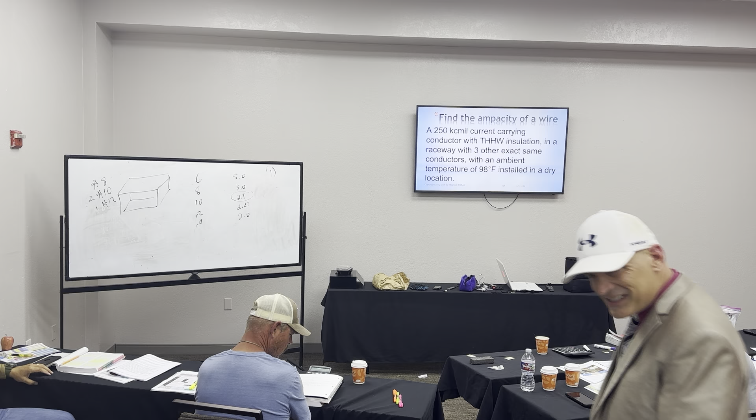We've got to do a couple of major sections here this afternoon. Did everybody get this? This is just somebody's notes. Again, this is a master's test, but it's even relevant to the journeyman specifically because of the sections, the type of questions and things. I think this is a good thing to talk about real fast, but I have not gone through here to vet the answers that he's got listed.

You got any extras of those? I didn't get one. Maybe they handed them out. It came in late, you came in late, sorry. Oh, I came in late too. Was there a package today? Yeah, I think this was yours. Oh yeah, yeah, yeah, right here.

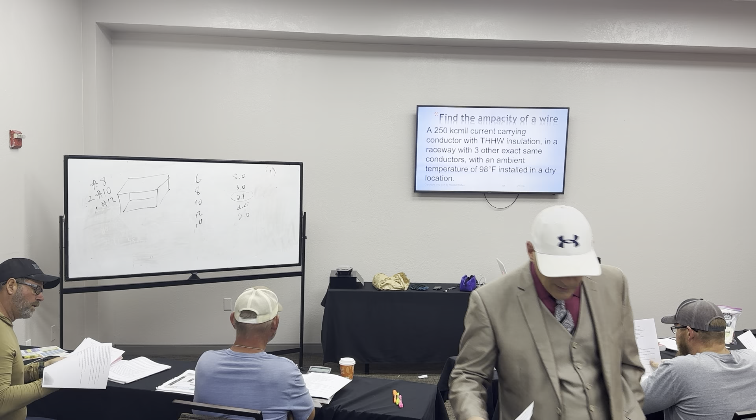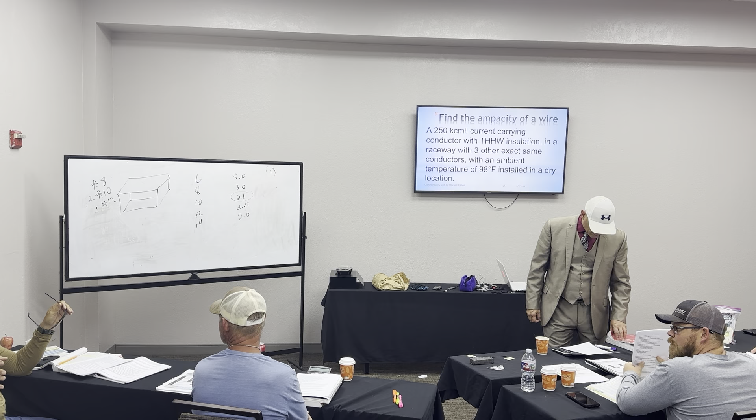We have an interprovincial red seal exam, so anybody else prepare? Everybody has a licensed journeyman in Canada. At the last day of school in 4th year, they would write the exam, and then they would keep the student allowance just for the guys and girls that wrote the exam. They'd sit down there and everybody get together and say, what questions do you remember? And then the instructors would write these questions down, not so that they could give them out, but so that they knew if they were teaching material that was relevant so that people could pass the exam.

You'd be surprised how many questions you'll remember after you write that exam. That's very true. If you went out to your vehicle with a piece of paper, you'd probably get about 75%. You won't forget right away. But the minute you pick up the phone or drive out of that lot, you'll lose half of them. If you look at page 11, at the top, see if that follows what you just said.

Do not leave the exam center until you write notes down. Keep a notebook in your truck, and as soon as you get out of the exam, before you drive off, write down whatever notes you remember. What he just said is probably the best advice I could imagine, because I can help you if I know what you're struggling with. If you drive out of that parking lot without writing it down first, you will go home and not remember. It's gonna happen - the first time you hit a stop sign, your mind's gonna go thinking about something else, and you'll lose some of whatever you just had. You're right there, it's fresh.

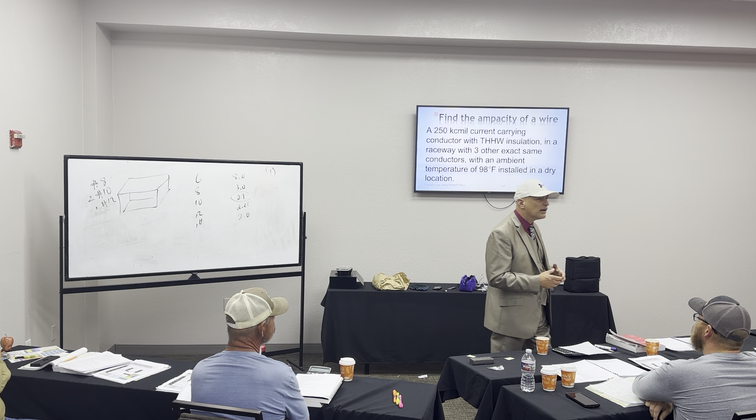So before you drive off, even if it's just a keyword, write it down. I can probably help you if you can remember the keyword, jot it down - you don't have to write the whole question. Just like if you had some particular calculation you were struggling with, or some question you didn't understand where to go with, those are the kind of things I can help you with if you can write down enough of it that I can get a feel for what they're trying to ask.

So, you guys have a name tag, she gave y'all name tags, right? My cell phone number is on the back of that.

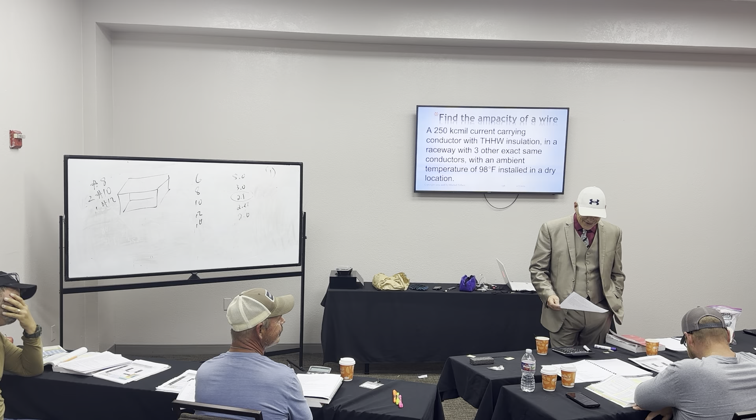So Ohm's law, right? I don't really want to tell you too much about Ohm's law because I don't want you to know much more than you absolutely have to have. So here it is, you see it in your code book is where it's at, and that's where I want to point you in the right direction. There are 2 formulas that are the only 2 you need to know, and they happen to take care of every single code section on page 28.

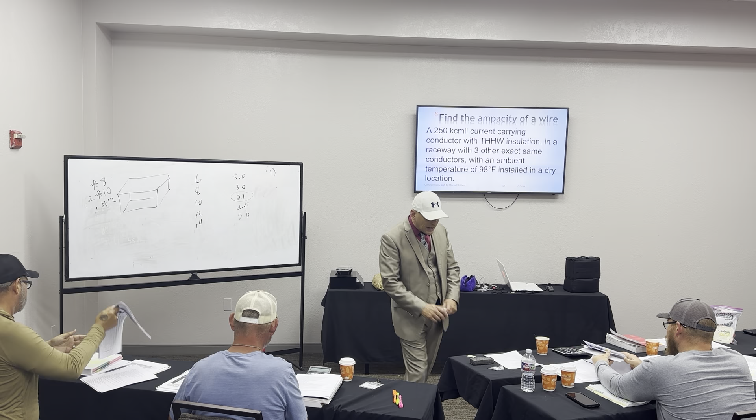Those of you who are older school, you know, PIE and EIR and all that stuff, forget it. Can anybody tell me what that E stands for?

I thought voltage started with a V. E over I times R? What is it? They explained it but I don't remember what they said. They said, what's the actual word for E? Energy? Nope. Electromotive force, right?

Yeah, I've never called a volt an electromotive force, ever. So for me, writing an E down is kind of confusing because I don't really recognize an E. I have to convert it in my mind mentally. A V, I know exactly what a V is, don't I? What about I? What does I stand for?

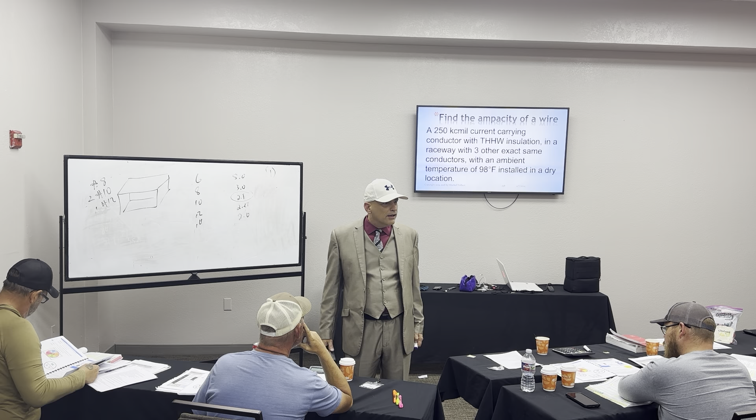I thought that starts with a C. Impedance? Nope, that's resistance. What does the I stand for? It's amps, right? I agree, but I thought amps starts with an A. But what does the I stand for? Current, that starts with a C. So what does the I stand for? Intensity of current. So again, I don't look at a meter and go, I wonder how many intensity of current values I've got here. I'm looking at amps, right?

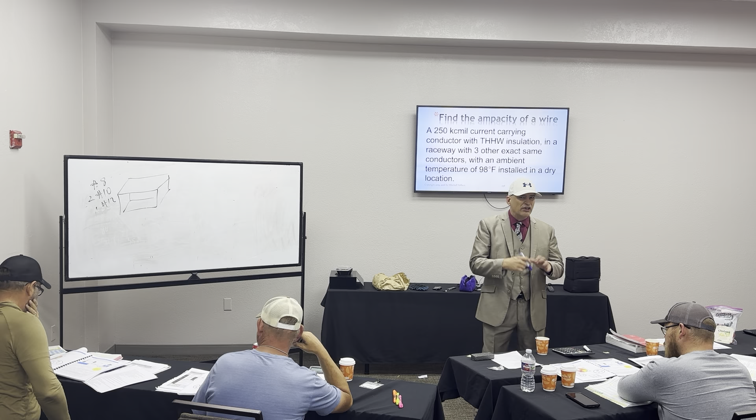So the EIR, the PIE, all that business you learned with, forget about it. It just takes too much time to mentally reconvert that. So here's what we're gonna do. I know a V exactly as a V, right? I know an A is an A, and I know an R in this case is a resistor. I know a W is a watt, I know an A is an amp, and I know a V is a volt, and that is so much easier to instinctively look at. You know what those values mean, they match up.

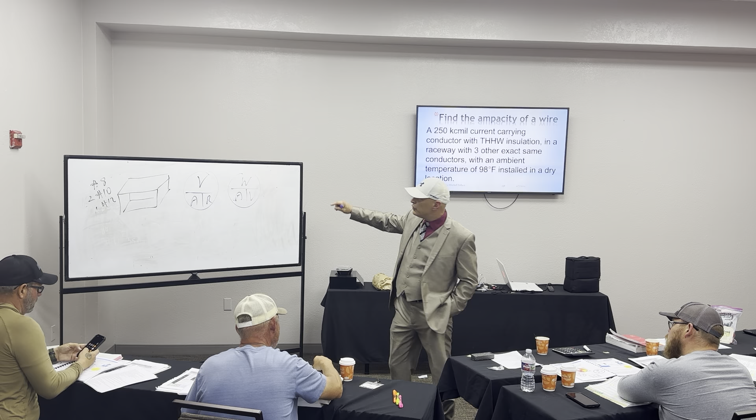So volt, watt and ohm. These 2 formulas are the only 2 you really need to worry about, but you do need to know them somewhat. If it has a resistor in the question, the only one you have to pick from is the ohm formula. If you're looking for a watt value, the only one you have is the watt formula. You use this one all the time without really instinctively realizing it, because that's what you do with an appliance, trying to figure out how many amps it is based on the system voltage.

We're doing the math here. This line, as I mentioned yesterday, that's a division. So if I'm looking for a value down here, I've taken the other one and divided it into the top. If I'm looking for the value on the top, this line here stands for multiplication. So I'm multiplying those two values together to get the top value. That's basically the formula that will circle.

Sometimes you may see it, anytime Henry uses a triangle or whatever, it's the same idea. Same concept - it's division, multiplication. This value and this value are the product of the two at the bottom.

And then the only other thing you need to remember is that these values need to be total values. In other words, sum of total at the branch circuit - total volts, total resistance, total amps, for example. Or when I'm looking at a branch circuit, I could be talking about just the values that exist right here across one resistor, or resistor number 2, or resistor number 3.

And so I can do the same formula isolated here with just the values that exist right here at this one point. When I do that, I'm going to think about that as V3, R3, A3, so I remember these are individual point values and not total values.

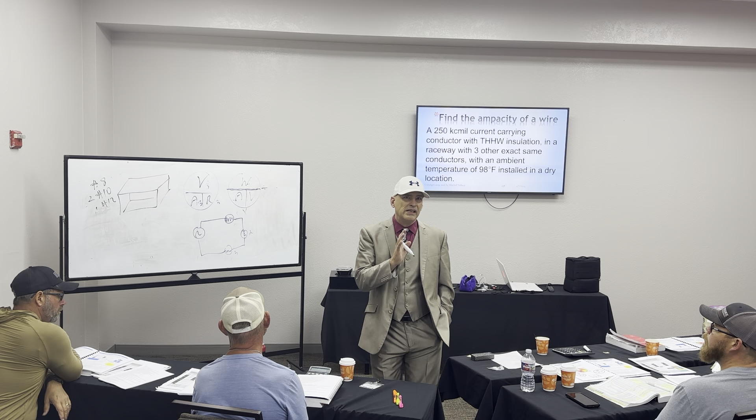Again, just because I wanted to make sure you remember that we don't want to mix total values and individual point values. They're either all just what exists there, or all total - sum total. Make sense?

All right, the other thing too, if you look on the top of page 28, I have parallel, these two little lines, the formulas written on the top of page 28, where you see the AT equals A1. You guys already know that instinctively. In parallel circuits, if I have 15 lights in this room and each light is 1 amp, then I'm going to take 15 times 1 and basically add or multiply it out and have 15 total amps, right? That's how it works. So the formula makes sense: AT equals A1 plus A2 plus A3 plus A4, the N standing for any number of additional values.

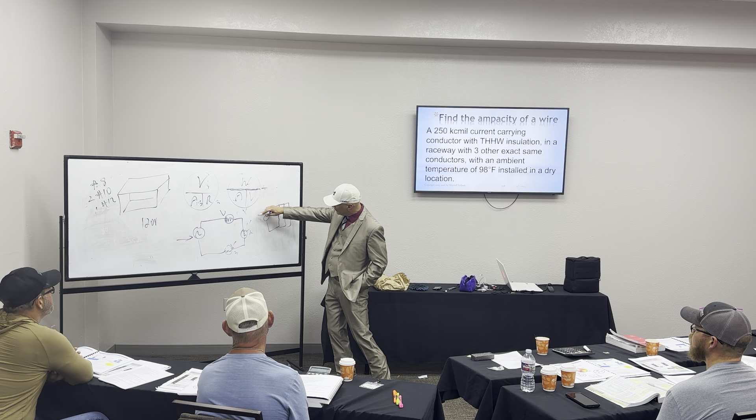But voltage in a parallel circuit, which is one of the reasons why we like to run things in parallel, is a constant value that doesn't change. So in a parallel circuit, 120 volts here - well, what do I have here, and here, and here? Well, this is a series circuit drawn... I mean, we're going to draw this here, don't want to confuse you all any worse than I already am. All right, in a parallel circuit where I've got parallel runs, the voltage here, here, here, here - they're all the same. Never change. I can count on that.

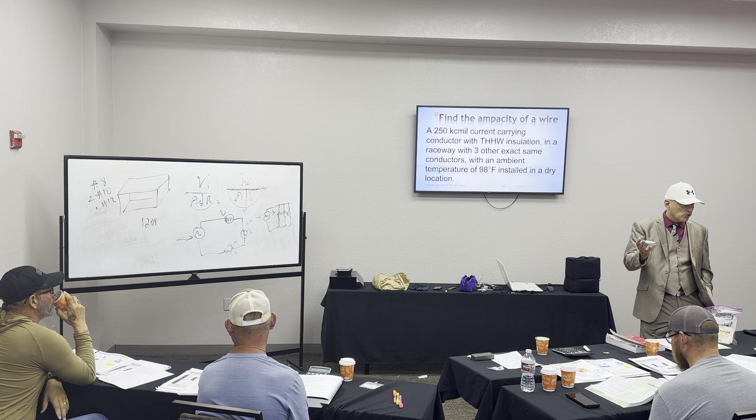In parallel, now if you look at the way we write that down, it's V1, or VT equals V1 equals V2 equals - so anywhere, the same value across the board. In series, they just reverse position. And I like writing it down like that because you can immediately instinctively realize what exists in parallel is the exact opposite in series circuits.

So amps no longer add up. This is really weird - so you're telling me that if I have 10 lights that are an amp each, and I add them together in series, it's going to equal 1 amp. Yeah, exactly, weird, right? It's weird. Amps do not add up. They're a constant value like your voltages in parallel. It's super weird, but once you get your head around it, I guess it kind of makes sense.

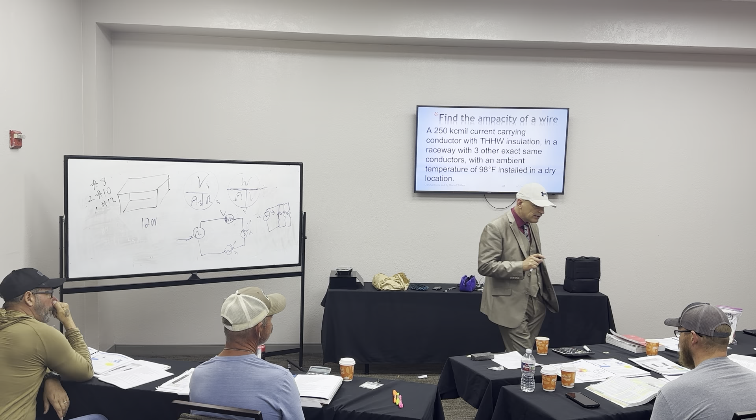But if I've got series PV panels, for example, if each one of those PV panels has 24 amps of output, and I put 10 of them in a string in series, I'm going to have a total of 24 amps worth of output. I do not get any additional add for amps in series. Now the good thing about that is that makes amps your ace in the hole, because if you know the value anywhere in that circuit, for a series circuit, anywhere in there, if I have one value for an amp anywhere in here, well then that's a key number, because then it's the same value anywhere else in that same circuit. Make sense? So just like voltage is our key over here in parallel, amps is our key in series.

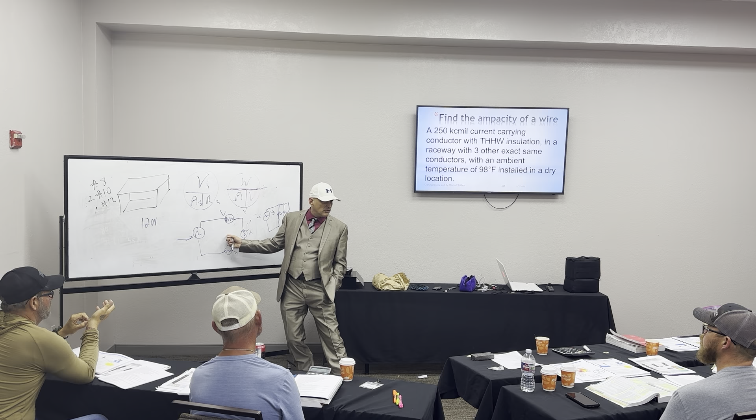I want to find out what the amps are as fast as I can, because that's going to unlock everything in that circuit. All right, that's that part.

Second thing to remember is that the volts drop 100%, or it's lost 100% across all resistive loads in a series circuit. So they write it as V1 or VT equals V1 plus V2 plus V3, but really the way we look at it is V1 plus V2 plus V3 equals VT. Every resistor in a series circuit is going to eat a certain amount of the voltage, and so when I come out of that resistor and go into the next one, I've got a lower value for the volts than I had coming into it originally.

So if this is 120 volts, for example, and I come through this resistor, I'm going to lose a chunk of it. Let's say it was a 6 ohm resistor, and this was a 3, and this was a 3 ohm. What would happen is I would lose 60 volts across that resistor.

How do I know it's 60? Well, because it's a proportionate loss, right? If I have 6 ohms, 3 ohms, and 3 ohms, if those two bottom ones are also the same, that means I'm going to lose half of it on the top one and half on the bottom. And not only that, I'll be able to tell you it's 30 volts on each one of the bottom ones because it's a proportionate loss.

What I'm getting at is if I have 120 volts coming into this and I lose 60, I'm coming over here down into this one with 60 volts. That's all I got left in the tank. When I go through that and lose 30 more, and I come in here and lose 30 more, I'm at 0 volts when I go back home. So I'm literally running out of gas, okay?

In a parallel circuit, voltage is not supposed to drop or lose. It's always supposed to be the same value, but we do sometimes have a voltage drop, and that's that 3%, 2%, 5% business you guys know a little bit about. So don't get confused with a voltage drop in series versus a voltage drop in parallel. In series, it's 100% loss. It's a drop of all of it.

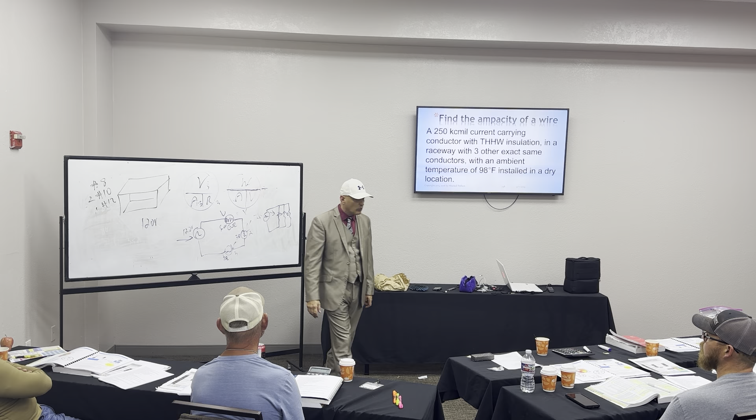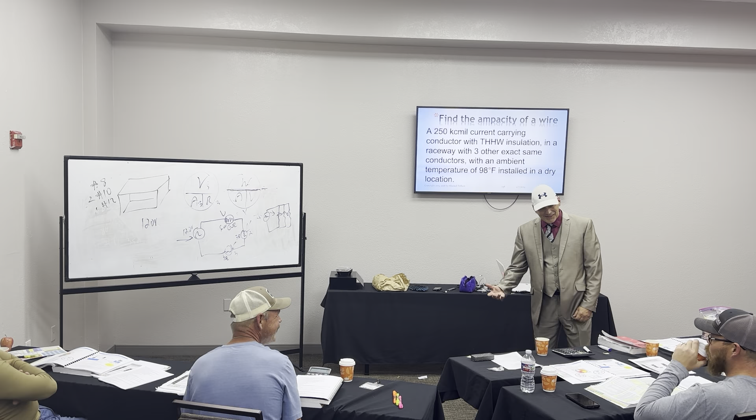You said 15 volts? 30? I'm sorry, 30 is what I meant. Thank you, I didn't write it down. I said 30. What's supposed to be 15 and 15? At least 60. Oh, 30, 30, 30, yeah, yeah, 60. 30, yeah, that's what I mean. I said 30, 30. Prove it. Anyway, thanks. Anyway, yeah, no, you're right, 30, sorry.

But you get the idea, right? It's a proportion loss. The bigger that resistor is, the more it eats.

So if there was 4 of them, then it would all be less? So you would start, would it still be, it's nice when your resistors are all values of a common number like 5, 10, 15, or 20, because you can almost do that in your head. If they're 3.5 or 6 and 12 and 8, it gets a little bit more messy because you can't really look at it cleanly. But at any rate, all right.

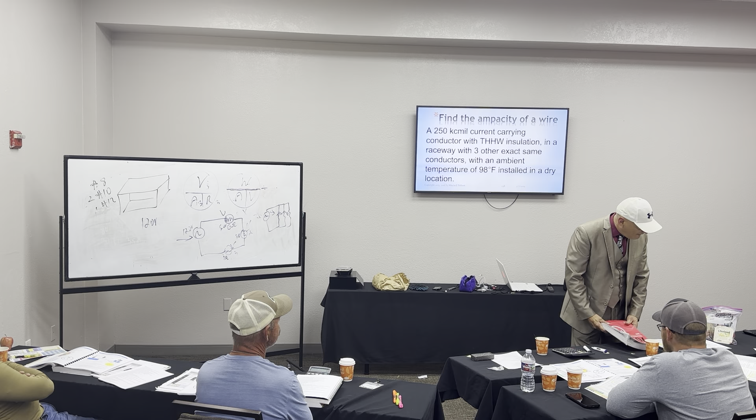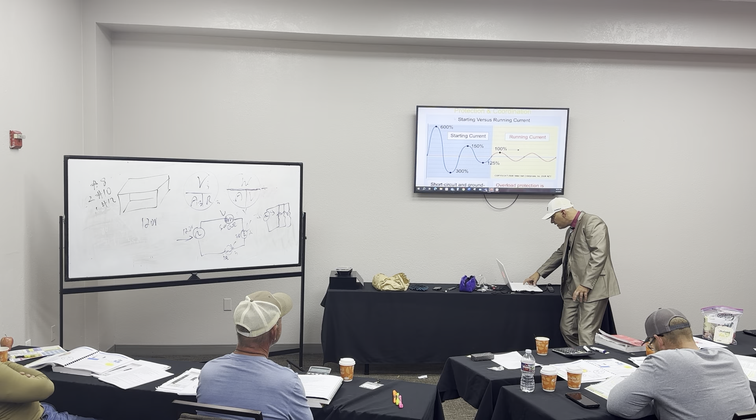Now, here it is. The two most complicated calculations you might possibly do would be resistors in parallel, which suck, I don't know how else to say that, or if you're doing calculations for voltage drop. I think those are the two things that confuse people the most. So I'm just going to quickly do a couple of quick examples. I've got some slides here, I think it'll be helpful for you to see. I'm going to go kind of fast because it's something I don't really need to get too heavy into, but I do want you to be somewhat exposed to it.

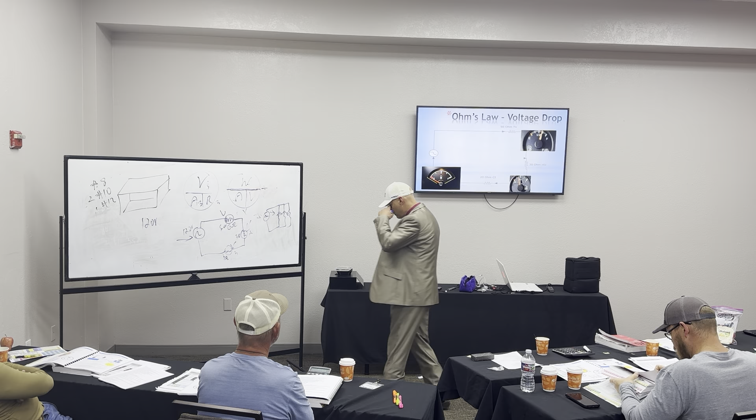I do want those two values or those two formulas that you see right there written down in your code book because those are the two that you really need to have and really need to know. There's one more formula that we'll get to in just a second that's also important, and that has to do with resistors in parallel. You guys don't need to write this one down, but you may have seen the formula called the inverse proportionate calculation for a resistor in parallel. It's kind of complicated and not very easy, I think.

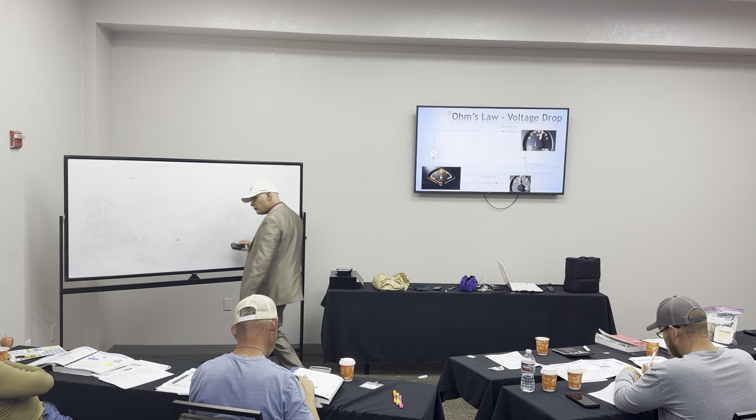You guys like fractions when you were in high school? Elementary? I know, right? So if I have 1 over...

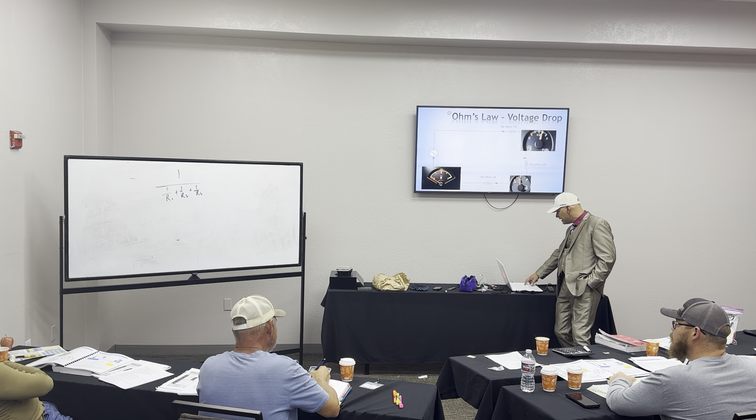So when you're looking at resistors in parallel, I think the way to make more sense of it is to think of it like a pressure tank. If I have a series circuit where I've got one gigantic water tower with one pipe that all the water comes through, that's a series circuit, and the diameter of that pipe, the length of it, and all the resistance it has to go through, every bit of that pressure has to go through that one pathway.

Make sense? So in the parallel circuit, it's more like a bucket where I put a bunch of holes in it, because the more pathways there are for that pressure to go out, the less the overall pressure is combined. Does that make sense? That's what's happening here with resistors in parallel.

Now to calculate that, I would put these into this formula here, and I'd have to do 5 into 1 and 10 into 1 and 15 into 1, and it's kind of a mess. You've got to convert those into decimals and add the decimals together, and then divide it into 1 again, right? So I would really prefer you to just forget about that one.

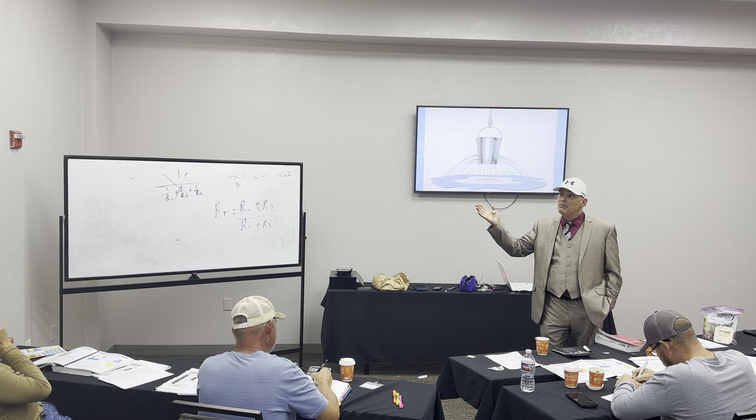There's another one that works with 2 resistors. This is much simpler math. Basically, if I have just 2 resistors in parallel, this formula will be a lot easier to use with those 2. And furthermore, I can use it with more than 2 by pairing them together one at a time, or a set at a time.

In other words, if I have 3 resistors here, what I can do is the formula of these 2 here, and get one value for those 2 together, and then do that one more time using the combined value and the other one together. So for example, RT equals R1 times R2 over R1 plus R2. In this case, we'll call this R1, R2, and this one something else.

So I've got... that is 5 times 10, and then 5 plus 10 on the bottom. So I'm looking at 50 divided by 15, right? 50 divided by 15 is 3.33 ohms. So these two combined give me 3.33.

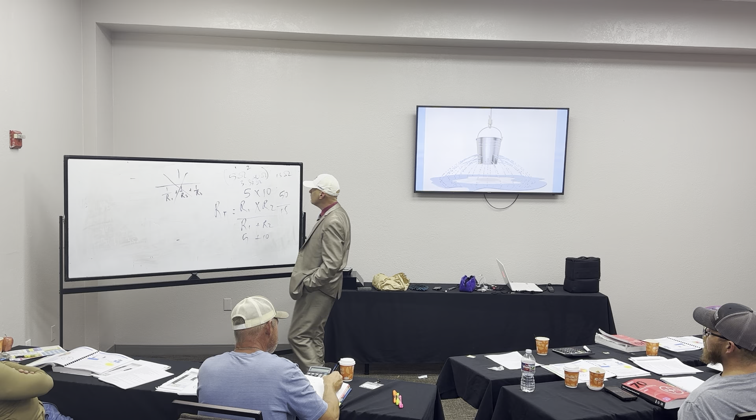Call it 3.33 ohms, put it there, okay? Makes sense? I'm looking at that 5, and that number needs to be less than the 5, so I feel like that's probably a pretty good number. Now that I've done that, I can erase these two and say the combined value of R1 and R2 is 3.33 ohms, and R3 then would be 15 ohms. I can just do the math. Make sense? That way I'm using a simpler formula.

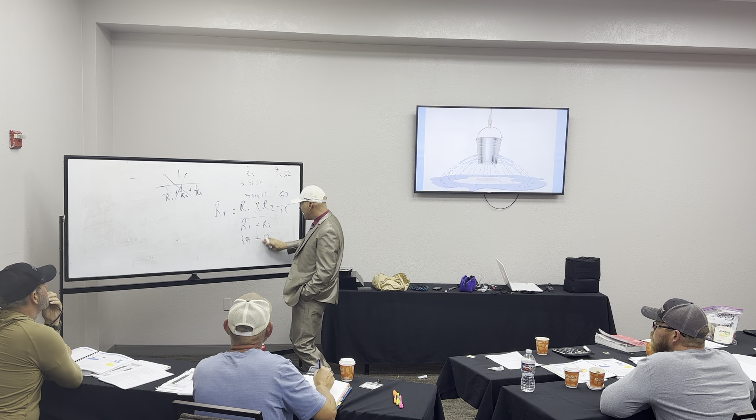I don't have to worry about that inverse proportion formula up there with the 1 on top of it. So I can go back here and do, instead of 5 and 10, I'm doing 3.33 and 15. Make sense? And the best part about it is you only have one formula to remember instead of 2. But you're going to need that one anyway, so now just use it instead of the other one exclusively.

So 3.33 times 15 divided by, what is that, 18.33? 2.72 ohms total, and that's kind of what we thought it would be - 2.73 ohms total RT for parallel. So the 5, the 10, and the 15 combined give me a value of 2.73, which is right at a little bit more than half, which is kind of what I thought it would be. Okay.

If you don't have that formula written down, it's in your book on page 27. Page 27 has a bunch of little formulas that I feel are really critical for you to have handy. Sometime before you go take your test, everything's on page 27.

27. Everything that's on page 27 should make its way into the back of your code book somewhere, because those are formulas that have to do with Ohm's law, voltage drop, and some other things written at the bottom. So as you have time, get those in. That R1, R2 is at the very top of the page, just so you know where it is. Page 27, get those all written in the back of your book.

The notes at the bottom of page 27 as well. Yep, I'll talk about that in just a second.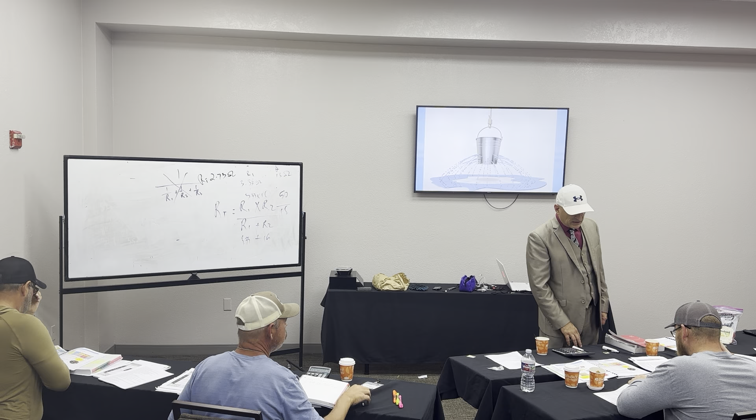I feel pretty good about that. I feel pretty good about that. What page were you saying, 27? No, in the code book that has the space to write all this in? Just one more time. Oh, look at that. Thank you, sir. Yes, sir. All right.

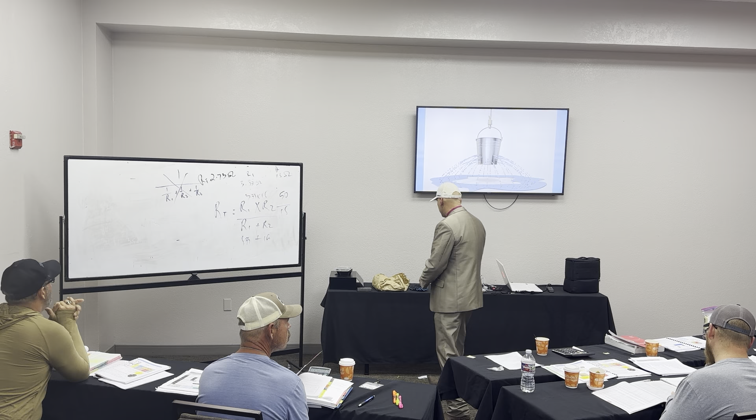All right, so is this—I'm going to assume that's parallel, I'm guessing. Well, let's work it out. I'll do it as a single phase calculation first, and then we'll go back to it with 3 phase. I believe it was the second answer, maybe? Answer C? Yeah, and then it was like a full, I think it was 2.

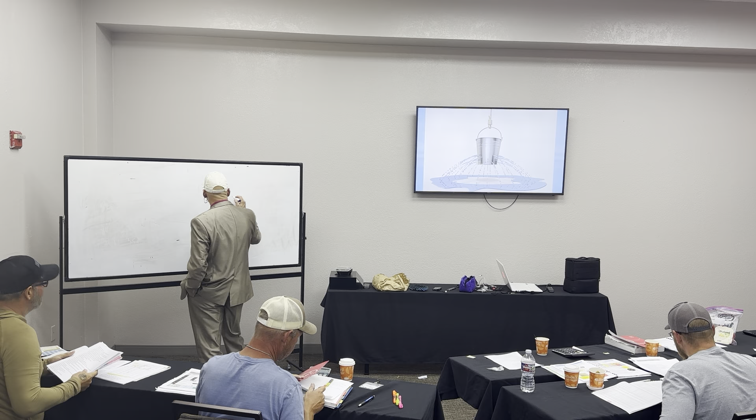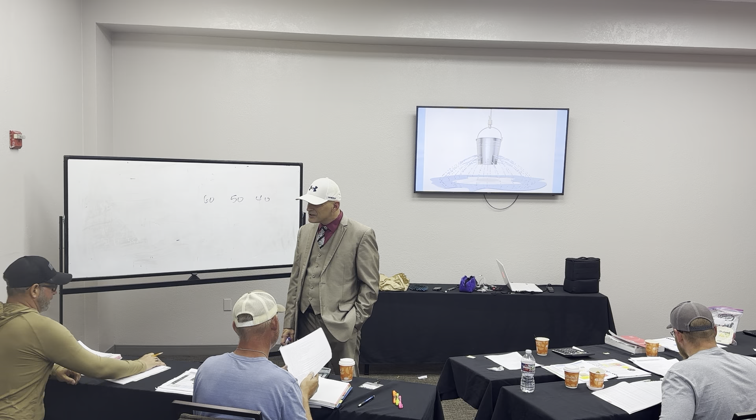No, I think it is 3 phase. I agree with you. What I said was going to do it as a single phase and a 3 phase, because it's a different way of doing it. But no, I'm sure it's a 3 phase calculation. How did you get 480? Is that a stinger? Is it a delta? It has to be a delta. We don't use it? We use 600. Can you, 600, yeah, so we use 600, 347. Yeah, you're right, down here it's 480, 277.

I've got resistors here, right, which means one thing and one thing only, and that is I'm gonna start with VAR, because that's really the only formula I can deal with. And I'm sorry, the resistors are ohms. Yeah, the resistors are right. All right, so I've got VAR basically is what I'm looking at, and they're asking me for the amps total, or maybe different amperage for each.

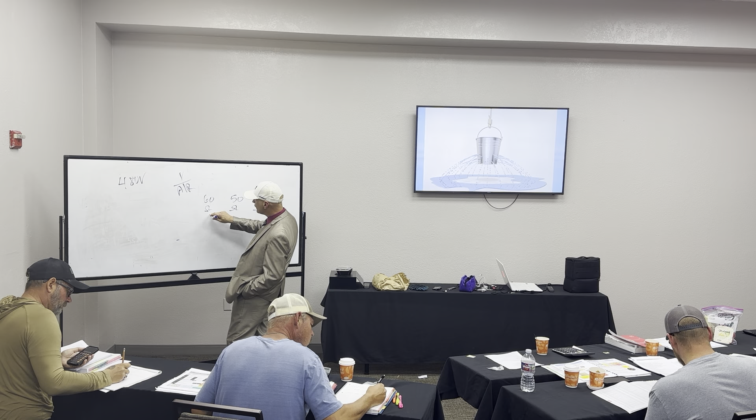So if I were to look at the amps right here where this exists and it was parallel, 480 volt being the circuit voltage, then I would be in parallel, 480 volt would be my top value. My resistor value would be 60 ohms. I'd take 480 divided by 60 to give me the amperage for that resistor. I'm cautioning you that it's probably three-phase, so it's really gonna be 830.4 divided by 60, right? But let's just do it as single phase first, just so we don't break anybody's mind, so that's 8 amps. And then that's gonna be 480 divided by 50.

What's it come out to be? 9.6, all right, and then the 40.

Volts divided by 40 ohms. All right, and then parallel amps add up, so I'm looking at 12 plus 9.6 plus 8, that gives me 29.6 amps total amp capacity of the calculation.

Right, 29.6 amps. In series, it has to be a parallel circuit. In series, it'll all be the same value, right?

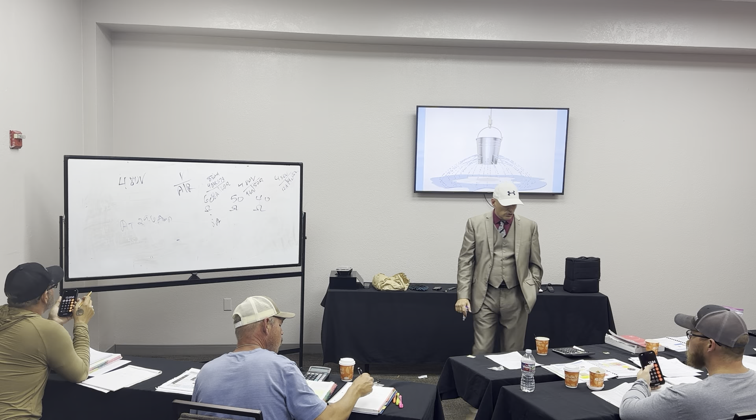If we did it as a three-phase calculation, then you're looking at 830.4, because that 480 volt would have been 480 times 1.73. So 830.4 for each one of those three divided by those values would have given you... You could also just multiply your answer by 1.73, you get the same thing.

You could, you're absolutely right, you sure could. Is it 830.4 or 830? No, it's gonna be 277, because the 1.73 divided in each one of those. I can't use 830.4, that's not right, it's gotta be 277 volts, because each one of these would be an individual leg in a three-phase service, or circuit. So it'd be 277 volts really, divided by 60. Otherwise I'm gonna get too many amps, an increase in value in amp capacity for a three-phase, which would not be the right way to do it. So 277 volts divided by 60, 277 divided by 50.

So would you be assuming that on the test? If they didn't specify 277 volts, they're telling you 480 volts, so what's happening? I'm not assuming anything.

What I'm doing is I'm dividing by 1.73 at the branch to get 277 for each one of the individual calculations. I could probably add those resistors in parallel together and get a total RT, then do it at the branch at 480 times 1.73 divided by whatever that total sum of resistance value is, and it would be the same answer.

Bless you. But my point is that when I have a three-phase system, my amp capacity gets to be less, not more. So if I were to do 480 times 1.73 here divided by 60, that's gonna give me a bigger capacity for each one of those values. So my total capacity would go up, not down, which is the wrong direction, right?

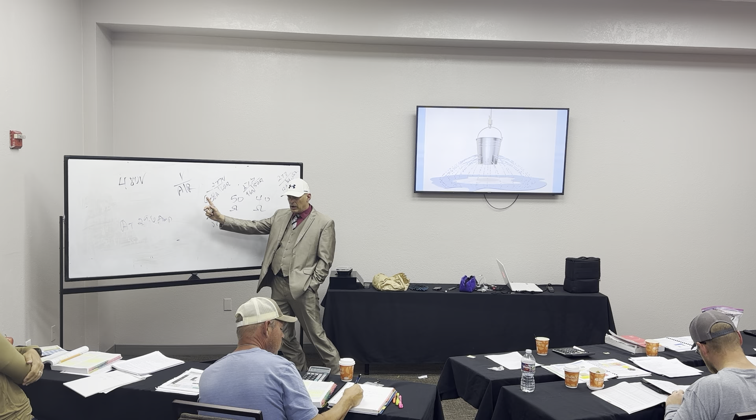So it's gotta be 277 divided by 60, which would be 4.61. I'm just gonna write this down. I don't really wish I knew a little bit more what that question was, but at least it's 2, and it's not even, yeah.

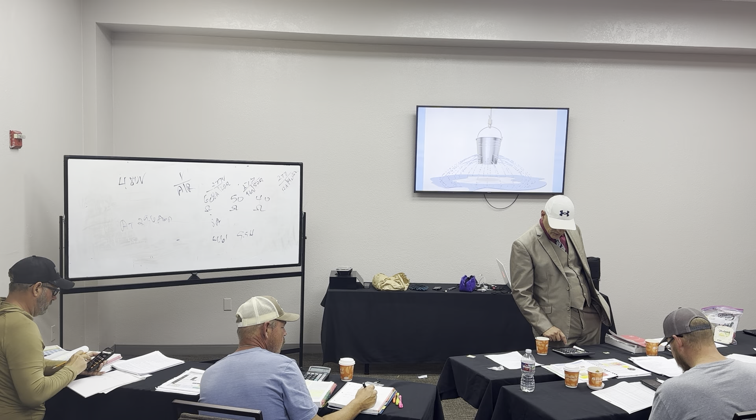I'm glad we looked at this before letting you loose with it. 50, 5.54. I don't see them doing this either, so I think what we did earlier was probably a little bit better, because I don't see them using such odd values like this. So I'm pretty confident then that's gonna be a single phase calculation, just because of the way that this math is coming out. But 277 divided by 40.

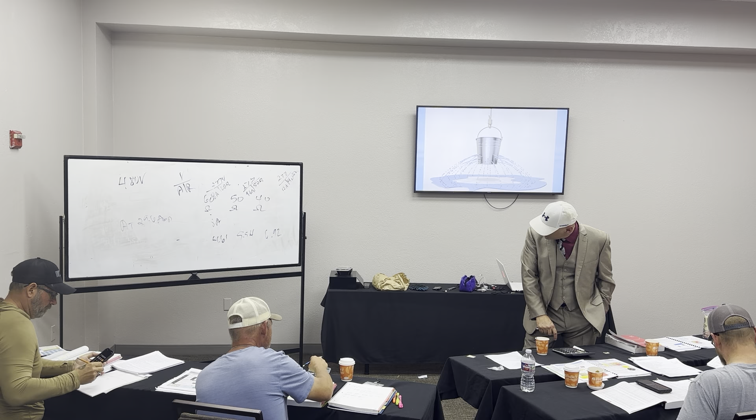6.925. Unless I add these together and they end up being a whole number, that's 16 amps. 4.6 plus 5.4 plus... 17.07, or somewhere in that area.

So, okay, so to do it another way is to just use 480, and then take your final answer and divide it by 1.73 and end up with 17.1. Same. So if you do your root of 3 at the end, you're doing less math. Right, do you guys understand what the root of 3 is for?

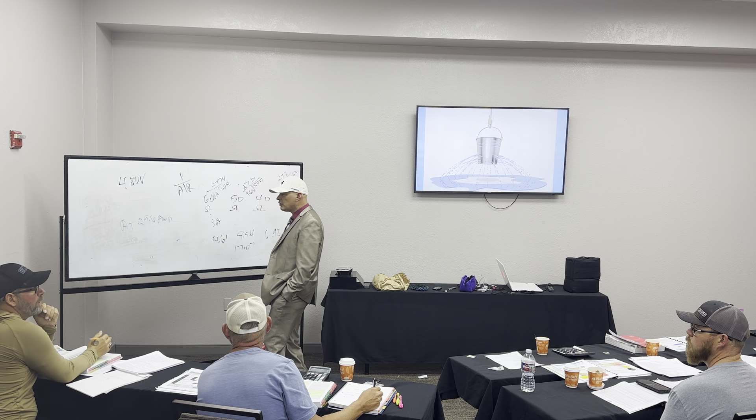What was it? The root of 3 is anytime you have 3-phase power, you need to multiply or divide your answer by the root of 3. How'd you get that number, the 1.73? Is it a trigonometry function? No, it never changes. Square root of 3 equals 1.73. Okay, cool, got it.

But if you take 480 volts and divide it by 1.73, what do you get on your calculator? 277. So that basically works out the same. If we're dividing it, we're taking it into single phase, 277. It's a little faster, huh? Well, the thing is, whichever way you do it, always do it the same way. I was taught to always do the square root at the end, so that's what I do, be consistent.

And it's less math. So what you're saying, for me, I'm comfortable converting things to amps because I'm used to doing it that way. How do you say it? I don't need to.

Honestly, though, I don't want to get too lost in the weeds with this because I don't really know exactly what the question's asking, but I guarantee you, just looking at the way this is coming out, that they're doing this as a single phase.

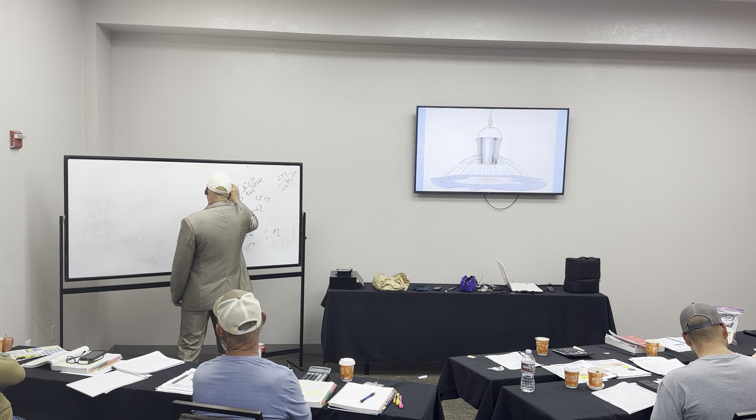It's just too messy otherwise, there's a lot more math and calculus here. I'd think for a question like that they'd say if it was 3-phase or single phase. That's just too juicy of a question, it'd be two totally different answers, both correct, depending on which one it is.

All right, that's all I want to talk about with Ohm's law. Voltage drop, I don't see much of it on the test, so I'm going to skip it. There's not really that much, we're not doing voltage drop, there's barely any.

On page 31, I want you to take a good look at my can lights. Do you have where to find the stuff to do that? Yes, there's a whole section right below. Y'all like my can lights? Look on page 31, what the heck, Maxwell House can lights. That is a can light, I don't care what you want to call it, that's a can light.

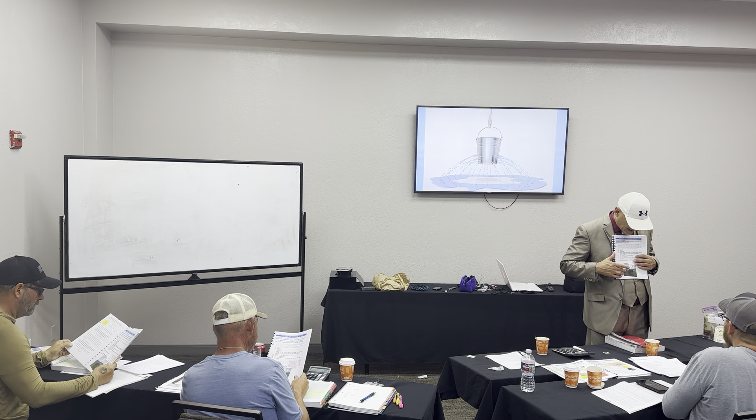This page is a must-read page, right? This is just a list of things I feel are so important that I want you to make sure you read it all the way through. So if in doubt, read the whole article if you have to. But what I've got listed there specifically is 250.20 - rather than having to read the whole article 250, I've got specific sections broken out for you. Spend some time going through those, read them thoroughly, underline them, use that index in the back to cross-reference.

I know there was quite a bit on separately derived systems and supply jumpers and all that jazz on the test. So when you're talking to me about that, 250.102C1 is what covers the parallel runs of conductors and things of that nature. Separately derived systems are all over the code book - chapter 7, chapter 2, they're all over.

Did I mention the homework assignment and the articles in the back? I told you about this in the back, right? You all know that's also part of it. So you've got your cheat sheet stuff on 31, you've got your tables that I mentioned, specifically back on page 20 or so, that I want you to go through. So that's kind of your homework setup as you get ready for your exam, okay.

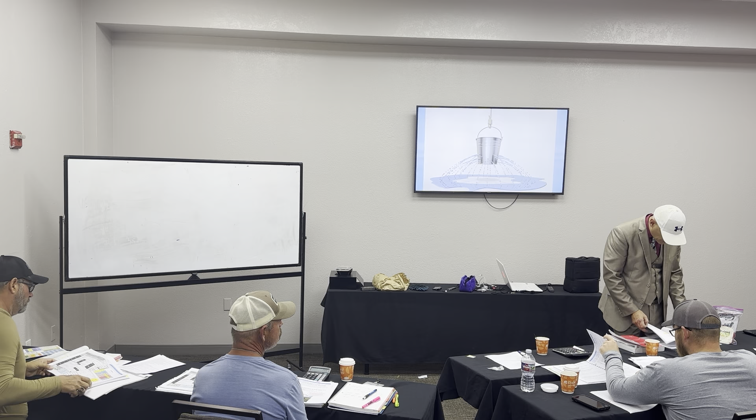The next thing we need to talk about is service calculations, specifically ranges, dryers, and some other sections. So in my code book or textbook on page 51, and then we're going to do more up to that.

If you think about the code book and its roots, it was written by insurance agencies based on the damage they had to pay out, and the idea was minimizing that cost for people perishing in fires. So it makes sense that in a residential application where people are asleep and die because of a fire caused by shoddy electrical installations, that's a pretty high payout. You'll see a lot of residential-driven codes in the code book, a lot more than commercial, because that's where the money's at when it comes to fault or damages. Human life being an incalculable value versus some commercial building with nobody in it that burned to the ground - that's just a monetary loss, not incalculable like losing a family.

That's kind of sobering, I mean you get that, but basically that's what this code book is written about. So if you look at 220, you'll notice that when we're talking about load calculations, there's a lot of calculations in 220 that are residential and not so many for commercial.

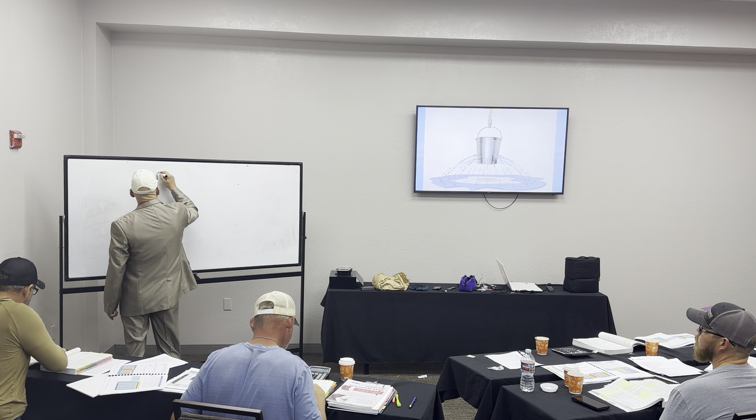And if you go a little bit further down, the next page, you'll see Part 3. What does Part 3 say? Feeder and service calculation. Bam, now that's the thing I'm getting at, feeder and service calculation. So as a branch circuit, I said earlier, it's really true, on a branch circuit, what is it that never happens?

It only rates 100% of that value. That connected load and the demand load are probably the same value, right? I don't have a diversity happening here because the risk is too great that they might come on.

But on a feeder, once I start putting a bunch of 20 amp breakers in the panel, I don't have to worry about them all being on at the same time. That's why I don't have an 840 amp breaker in the top of that 42 space panel. It's those 20 amp branch circuits, right? Because I take that diversity factor and I'm basically taking a chance that all of that stuff's not gonna be on at the same time. So that's where the derating happens.

If I'm derating something, it better be a feeder calculation, it better not be a branch circuit calculation. If anything falls under branch circuit loads, leave it alone, don't try to take any tables there.

If you notice, part 3, where it says feeder calculation, happens, in my case on page 94, before any of the tables that have derating factors on them. In other words, every table that has derating factors on it is part of part 3, which is a feeder calculation, not a branch circuit calculation.

Now do you know that? The distinction when they tell you or ask you to calculate a branch circuit is vastly different than if they ask you to calculate the same thing but as a feeder calculation, right? I'm gonna use the same beginning calculations that are in part 2 for both feeders and branch circuits. The difference though is I've got one extra step when it comes to feeders where I don't have that step with branch circuits, okay?

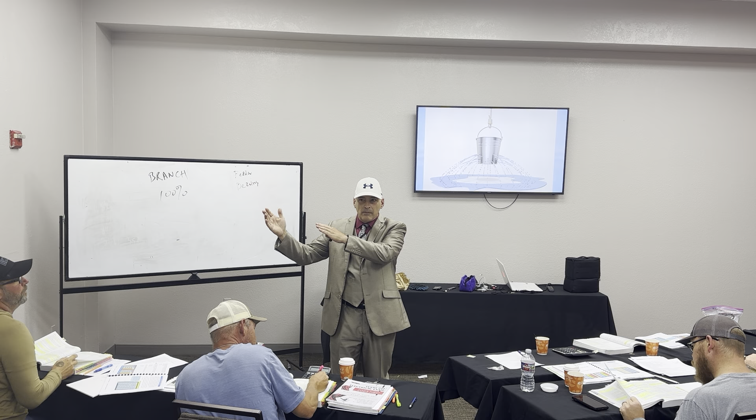They come pre-manufactured with a receptacle outlet about every 12 inches spaced out on the strip, right? So really, multi-outlet assemblies, M-O-A, given the fact that they're in a length of wire or metal there, with one receptacle about every 12 inches, well, guess what? These are general purpose type setups because I don't really know what you're going to plug in.

So I'm not worried about continuous duty in these types of calculations. But what I am worried about is whether or not the things that are plugged into it would be on at the same time or not, right? And so simultaneous use is the way they approach it, right?

If I've got 5 things plugged into this 5-foot strip, and these 5 things are interlocked from each other as a process—we're not like in a lab where I got to do step 1 before step 2, step 3, so on and so forth—where I know that linear process won't let them be on at the same time, then that's a non-simultaneous use plug mold strip, right?

And that's what H1 is talking about. Where they're unlikely to be simultaneous, then every 5-foot section is going to be watered down into a single count that equals 180 volt amps.

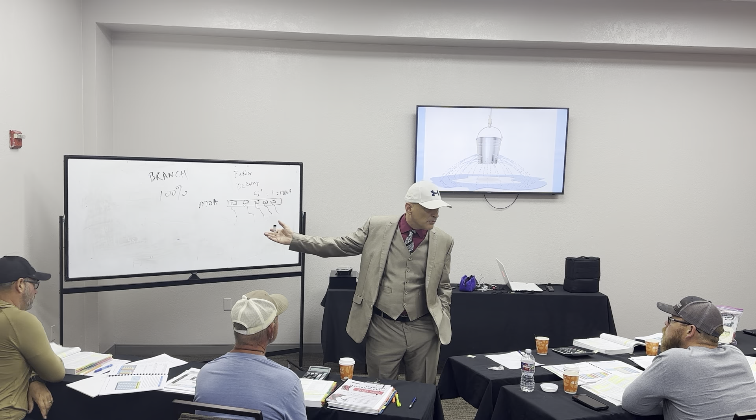Now, if you ask me, the nature of what a plug mold is, is that you can't guarantee that stuff wouldn't be on at the same time. I mean, that's kind of the whole point of something like that, so you can plug a bunch of stuff in there and hopefully it'll be on. Some parts will be off, other parts will be on, but if there are 2 of them that are on at the same time, that's simultaneous use, right?

So if it's simultaneous use, where more than one of these things could be on at the same time, then every foot counts as 180 VA. So that's the difference: H1, I'm watering this 5-foot section down into 1 count, but when it's simultaneous use, then every single foot counts. So if there's 5 feet, it's 5 times 1 count, which is 5 times 180 VA. So it's significantly more calculation-wise than what the non-simultaneous use would be, okay?

Non-simultaneous have to be done by each section, because if you're not careful, what would happen is that these were multiple lengths of separate plug molds, right? So I've got another one that's 4 feet, and I've got another one that's 6 feet, right?

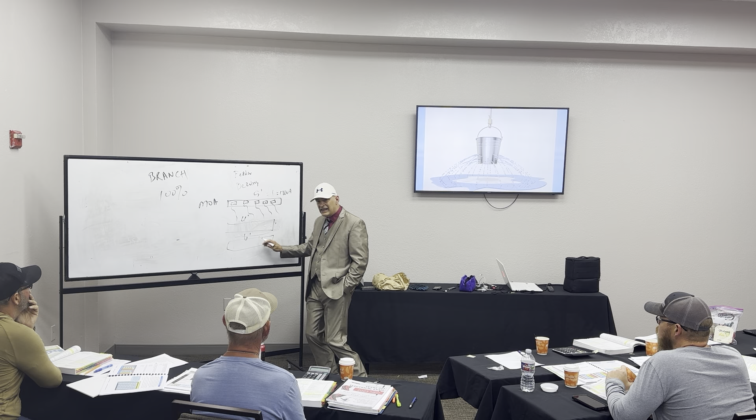So I've got a 6 foot section, a 5 foot section, a 4 foot section. I have 3 separate pieces. If I add all those together first and divide them by 5, I'm gonna get less than if I do them individually. Because the way this works is it's every 5 feet or fraction thereof, not a major fraction. So one section that's 6 feet would actually count as 2 counts, because I get one count for the first 5 feet, and then the extra piece left over, whatever it is, also counts as another count. So I'd end up with 2 counts, 1 count, 1 count, for a total of 4 counts. But if I were to add these together, I get 15.

If I divide that by 5, I only get 3 counts, right? So as a non-simultaneous application, I cannot add them together first. I have to do each section individually, and I'm gonna round up anything that doesn't equal exactly 5. Or if it's less than 5, it also counts. So a 3 foot or a 4 foot would also count the same as a single 5 foot section. So any fraction of a 5 foot section counts as a single count.

All right, so non-simultaneous, really we're watering them down, so we're getting a lot smaller number than we would if they were simultaneous in use. It takes a lot of these to really get there. But as a branch circuit, that's all there is talked about here, this is a calculation for a feeder.

If you look at the table on page 95, that's 220.47. It says demand loads for non-dwelling receptacle loads. Everybody see that really tiny table? It's got 2 rows on it. It's a small table, but it's a table nonetheless.

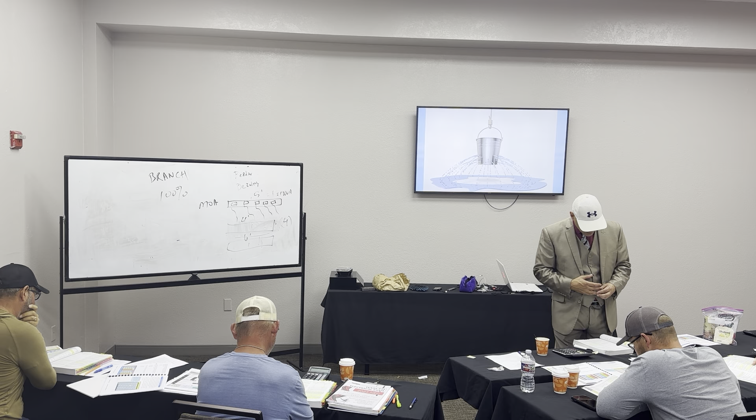220.47, demand factor for non-dwelling receptacle loads. Now, is this a non-dwelling receptacle load? Yeah, maybe, probably, most likely, but not always guaranteed. It could be residential, so I probably wouldn't calculate it the same way. But at any rate, I would still use this table for this application.

If you look at the article, it's the same under 220.47 or above. It says other than dwelling, receptacles calculated in accordance with 220.14H are allowed to be derated by this table. So what's happening is, because of the way that's worded, I have permission to use the derated table for these calculated values under 220.14H if I'm doing a feeder calculation.

The way this table works is the first 10,000 VA I can't touch. So if I do a load calculation, let's say I had 23,000 total VA of load. If I did a load calculation on a bunch of multi-outlet assemblies and had this total calculated value of 23,000 VA, and I'm doing a feeder calculation, I'm looking at this table going, okay, as a feeder, the first 10,000 of that number I can't derate at all.

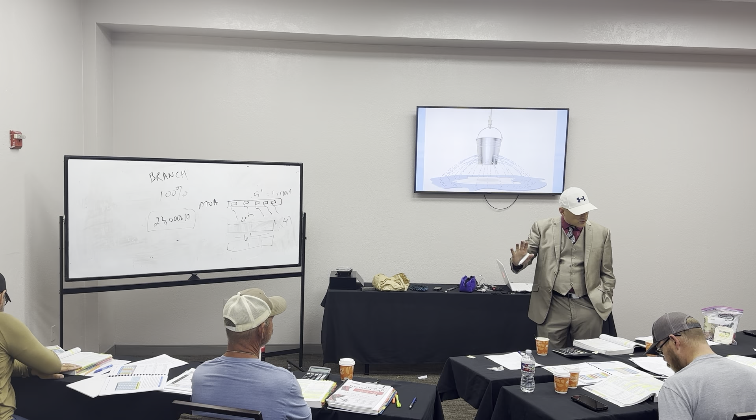So I'm gonna take 10,000 and just put it over to the side. I'm not gonna subtract it, because I don't want you to think we're getting rid of it, we're just gonna move it out of the way. And the balance, the 13,000 left over, I'm taking a 50% derating factor, because that's what that second row is. So the first 10,000 I can't touch, I put it in the bank and hold on to it. That leaves me with 13,000. So the amount above 10,000 is what that 50% would be applied to.

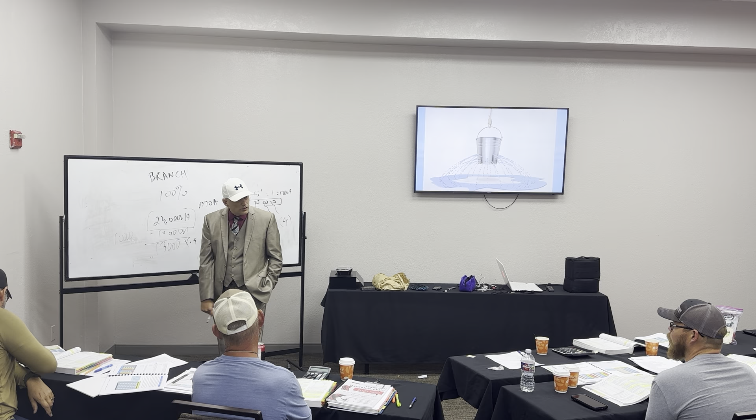So I take 50% of that 13,000, what would that be? 6,500. Total, and then add that to the 10,000, so 16.5 kVA as a final demand load for your feeder calculation.

As a branch circuit, what were my answers for the branch circuit calculation? Same question, same 23,000 total VA broken out. As a maximum demand on the branch circuit, what would the number be? 23,000, right? Because you don't derate a branch circuit, this table wouldn't apply. So as a branch circuit, I have to calculate 100% of this load. I'd have the number of circuits, whatever number I'd need to distribute it, but I wouldn't be able to derate this number. I'd have to keep all of it.

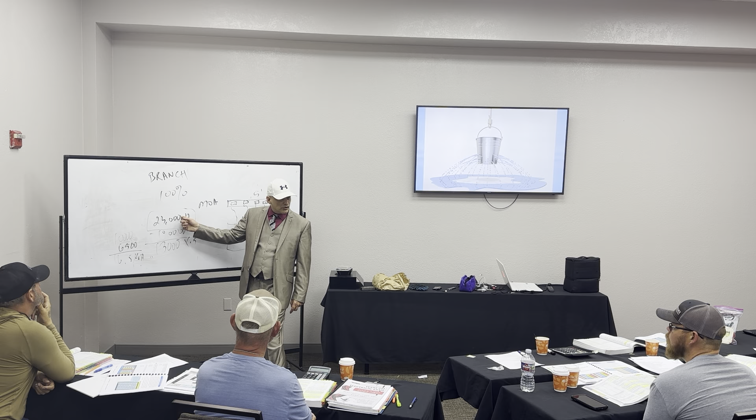So branch circuits, 23,000 VA would be my answer. Feeder calculations, it would be 16.5 based off the application of the table, given that we're hoping for the diversity of things to kind of work out, okay? I'm going kind of fast, I get that, but there's just a lot to cover. So if you have any questions, don't hesitate to speak up.

Receptacles, under 220 - well, this is kind of confusing because they can move this around. But receptacle outlets, if you look on page 94 in my book, it's 220.14I. It's in the left-hand column at the top of page 94, where it says receptacle outlets.

To the left of that, write the word commercial and make it big. Section J below deals with other receptacles that are non-commercial - specifically office buildings, which we'll talk about in a minute. Receptacles in a residential dwelling are in 220.41 at the bottom. So what's left for receptacle outlets under I is basically anything in a commercial building that's not an office or bank. It's real simple.

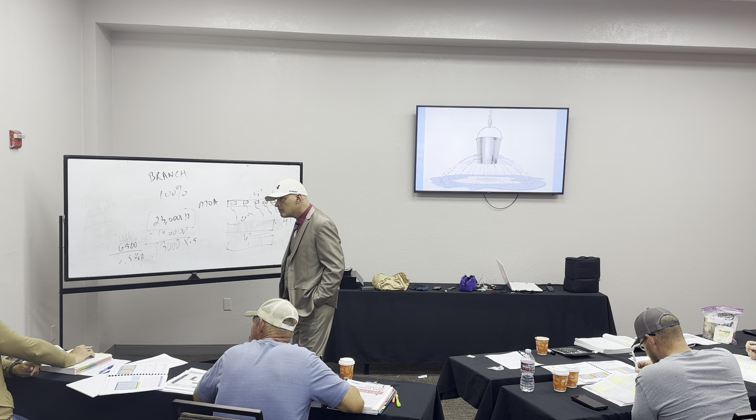So they don't consider an office or bank commercial building? Well, they do, but they consider them special because the use of those two occupancy types is heavier. In a grocery store, your general purpose receptacles are really only used for cleanup time and stuff like that, but in a bank they've got all kinds of things to plug in, so it's a heavier demand on the circuits for general purpose receptacle calculations.

So under section I, let's talk about a yoke. Anybody know what a yoke is? It's the yellow thing inside an egg, right? Well, that's what a yolk is. What is a yoke? I don't know, they don't define it - it's the straps that the receptacle's built on, or like.

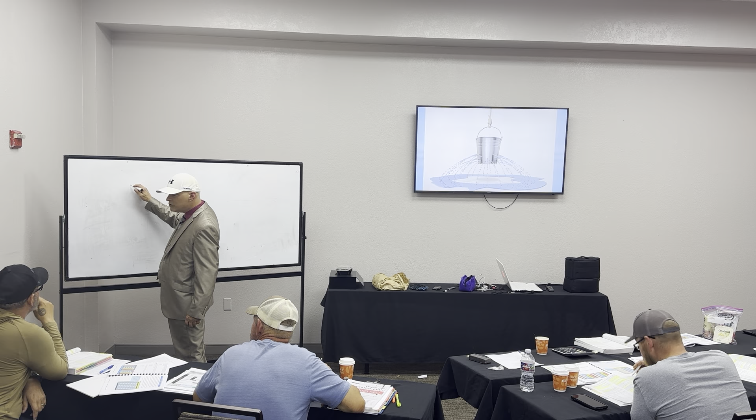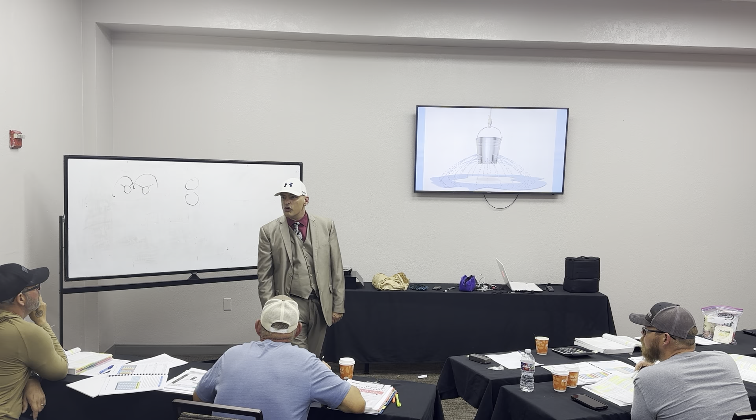If I have two oxen and I want to put them together, I have to use a yoke, right? That way I harness both of them together. Same thing applies to a receptacle - if I want to harness two receptacles together on the same device, I put them on a yoke. So I'm yoking those two receptacles together to give a single device. The yoke is really a single gang - the strap that holds the device into the box and takes up a single gang.

Every one of those yokes, or in my case a gang, is an equal value of 180 VA regardless of the number of receptacles on that yoke. A duplex receptacle's got two receptacles on that single yoke - that would equal 180 VA. A simplex with one receptacle in a single gang would also count as 180 VA, because it's the strap or yoke that counts, not the number of receptacles.

A quad, which is two gangs, each with receptacles on both sides, would be 360 VA - 180 VA for each of the two gangs. It doesn't count the actual receptacles, unless the last part of that section talks about a single piece of unit equipment built into the equipment itself. If you have 4 or more receptacles, instead of doing it by the gang, we do it by the receptacle. But it's a very special application, and I haven't seen a question about it in a long time, so I don't really want to get into it.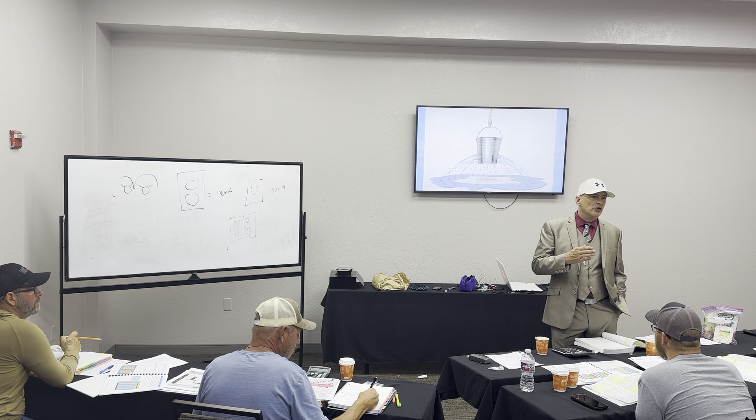We'll just leave it at the gang being 180 VA. The way they word these things: given a residential or commercial building, you had X number of receptacle outlets for general purpose receptacles, or outlets for receptacles. When they say outlet, they're talking about that box we're going to put the device in. When they say there's 60 outlets for receptacles, they're not saying there's 60 receptacles - they're saying there's 60 gangs of outlets, whether that be duplex or simplex.

Make sense? I don't care if it's 15 amp, 20 amp, GFCI, non-GFCI, or USB. If it fills a gang and it's a device and it's receptacles, it's 180 VA. It doesn't matter to me what the ampacity of the device is - it's just the gang that it fills, the fact that it's a device or a receptacle. That's all listed under section I there.

So let's say we had a restaurant where we had a bunch of receptacles listed out, but I'll just give you a total of 165 outlets for receptacles, and we're in a restaurant. I don't know how to spell restaurant.

There you go, don't know that. I don't know how to spell it, do you? I said it, you guys. Where's that restaurant? That is a good restaurant. Anyway, electricians are the world's worst spellers, and you guys know exactly what I'm talking about.

Each one of those outlets for receptacles is going to be applied under 220.14(I) at 180 VA for each one of those. So I'm going to take 165 times 180 VA. What's it? 29,700?

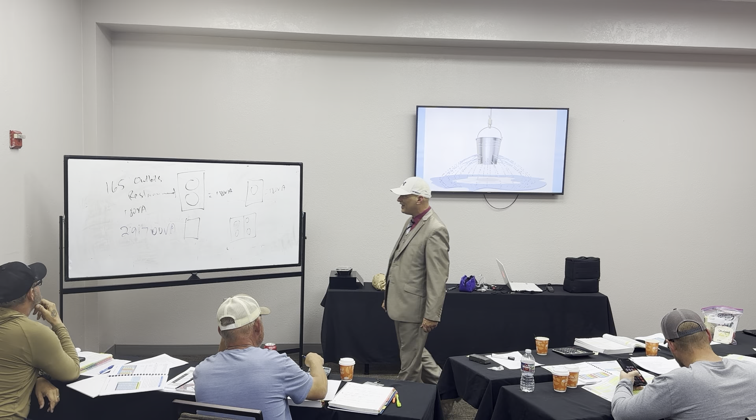Feel free to double check. I don't know if you guys can see that. 29.7? I'm gonna go with it. I'm happy with it, 29.7, 29,700. There you go. Got it. Yeah, it did, 29,700, right? Agree with that? All right, what do we do next?

Well, it depends on if I'm doing a branch circuit calculation or a feeder, right? If I don't tell you it's a feeder, on the test question I'll ask you one or the other. But did I say one or the other here? I didn't really say it, did I? All right, so as a branch circuit calculation, that 29,700 is my answer. That's the demand on the branch circuit.

Don't derate, right? As a feeder calculation, I take the first 10,000 away. 19,700 left over will be divided by half, or times 0.5, and then add. Is 9,850 a half of that? Yeah. Plus 10 is 19,850, 19,850, or in the case of the branch circuit, 29.7 kVA. Okay?

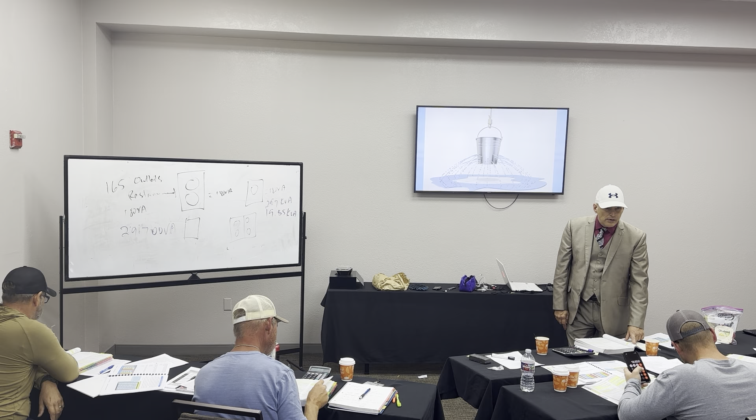Don't derate branch circuits, okay? Now, in banks or office buildings—now we stopped calling them banks because it says under section J, right below that, receptacle outlets in office buildings. But if you look at the table over here, 220.42(A), down at the bottom they have note number 4 that says banks or office type occupancies, right? So really it is still banks or office buildings, and I want you to write that next to office buildings—put 'or banks.' That way you remember that applies to both.

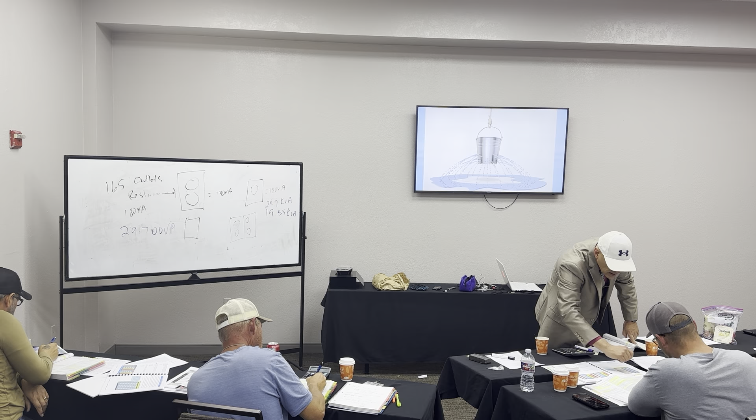I'm talking about 220.14(J), which is right below the section I was at. The reference I gave you just says office buildings there, right? But if you look at the table on 220.42(A), the lighting table, the note 4 down there at the bottom says that banks or office type occupancies, right? So basically it is banks and office buildings still, even though they kind of changed it.

I like this because now they've broken it out into branch circuits under this section, and they have feeder calculations separately. If you look at 220.43—where is it, 43, yeah, options, I'll put it right there. So the difference here is that the branch circuit is 220.14(J), the feeder calculation is 220.43. They look very similar to each other, but because the application of the derating factors is kind of confusing, they've spelled them out into two different sections now, but it's the same math, right?

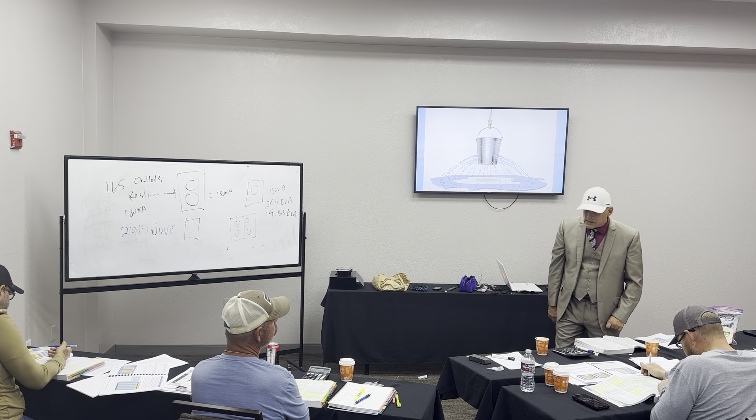What's happening here is, like for example in my office, in my residential house—I've got 4 receptacles in that entire room, one on each wall, it's kind of a small room. So I've got in my office 4 monitors, 2 computers, a laptop, an iPad, 2 cell phones, 2 headphones. I mean I've just got a bunch of stuff. I literally have—you know those 9-packs that go onto the duplex? You've seen those before? Yeah, and I got another 6-pack on the bottom of that. So I've got all kinds of plug-in strips because I know what I'm doing, right?

Hey, it's kinda like a mobile mechanic—non-simultaneous use, right? Anyway, the point is that they saw me coming a long time ago. They know that in an office environment I'm gonna overuse those general purpose receptacles way more than you would in another type of occupancy that has less use of it. Because of that, I've got this minimum calculation that I have to do, which is effectively what number 2 is. So J2 says, look, no matter what, I can't have a value attributed in a calculation that's less than 1 VA per square foot to be added in for receptacles, regardless of the number of receptacles that I have.

Now, I could be looking at a set of plans for this restaurant, and I could see these 165 receptacles spelled out. I could count them all out, right? But the square footage of this restaurant could be 28,000 square feet. That's a hell of a restaurant, isn't it? 28,000 square feet, that's nice. Was that a Hollywood one of those?

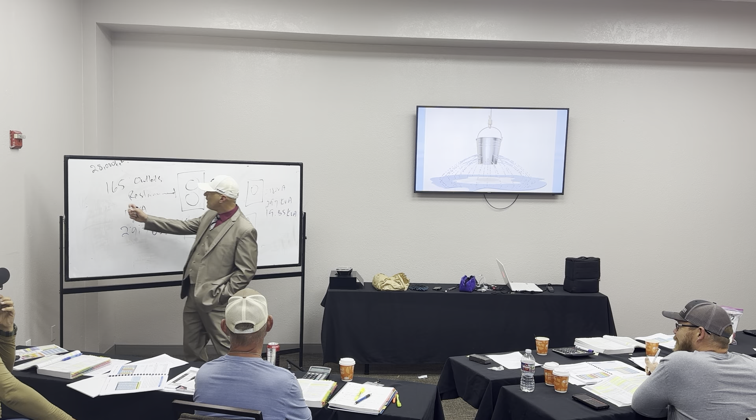Anyway, 165 receptacle outlets. My load calculation for the branch circuit was 29,700. So if you look at section .14J, the very first number there says calculated load from 220.14i, so effectively they're telling you to do that same math we did a minute ago, where we take 180 VA for each receptacle outlet, and that 29,700 VA is the resulting value for the branch circuit. That's basically what number one does.

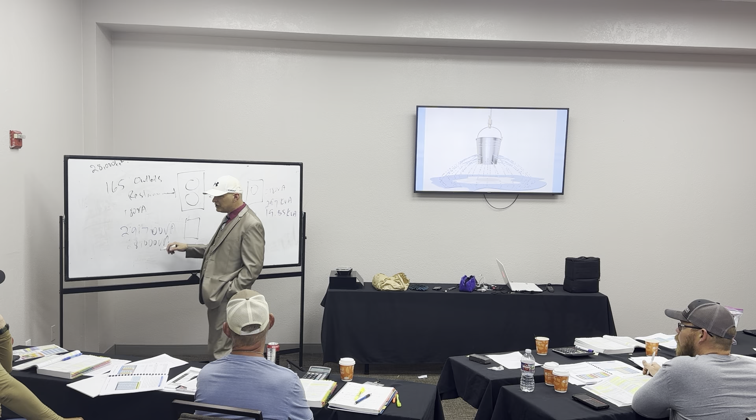Then as a separate calculation, I look at the square footage and multiply times 1 VA per square foot, so in this case 28,000 square feet times 1 VA would be 28,000 VA. I just look at these two separately, and whichever's the bigger number would be the load calculation for the receptacle that I got. I'm not derating anything here, because I don't derate branch circuits.

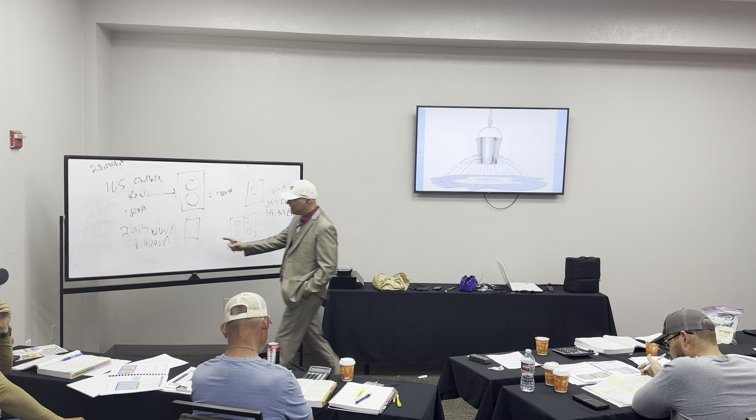Now, as a service calculation in the other section, which is 220.43, it does tell me that I will take the demand factors when I'm doing the 220.14i. So this math right here, the 29,700, under the feeder calculation in that second section, tells me to take the derating factors like I would as a service calculation. So I'm gonna take the first 10,000, and then 50% of the rest of it, and that's what this number was right here.

The 19,850, right? That's what this was.

So I end up, yeah, come in here. Yeah, please. Yes, thank God. No, it's in here. Hey, hey my friend, who ordered pizza? That's nice, you guys. You know, figured out my...

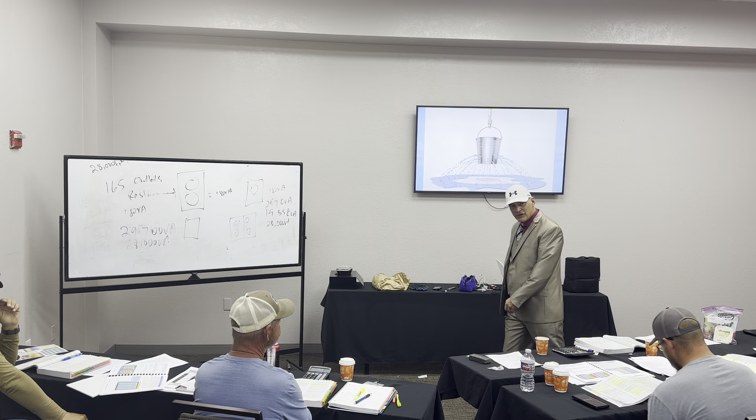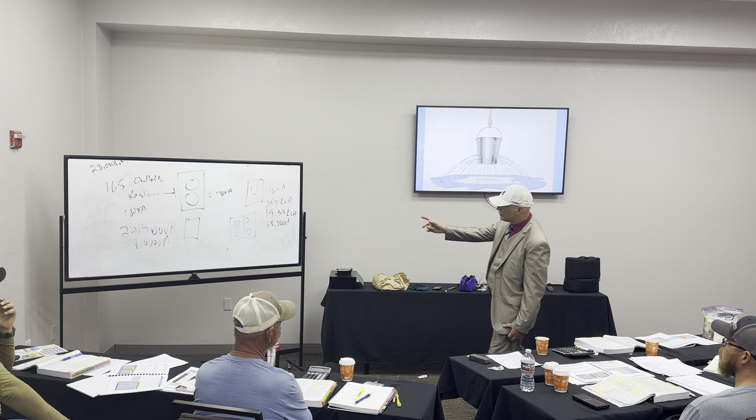Anyway, so what I'm getting at is the branch circuit, this would be the larger number. The sum for a branch circuit under that first section, dot 14I, I'm looking at 29.7. Under the second section, this becomes a smaller number because I derate the first one, but I don't derate the second one. So no matter what, don't derate the square footage either way - the square footage is the minimum threshold amount I have to calculate. In that case, 28 kVA or 28,000 VA would be the answer for the feeder calculation.

Can't make this shit up. It's really cool, he got real happy when the food came. Yeah, I'm telling you.

Do you have a second copy of this? You can take a picture of that and then text it to me. Yeah, appreciate it, and then give that to the young man back there. I say young man because this young man - I'm 50, I don't want to say how old I am, 54. Oh, you're young. I just had a baby. Oh man, hell, I'm trying to be like... No, I used to think I was smart. Hey, I'm not. Do the math on that one, huh?

Alright, let's take a break and eat that pizza before it gets cold, and when we come back we'll pick back up, about 15 minutes. Go get yourself a drink, a beer or something. Don't tell me that.

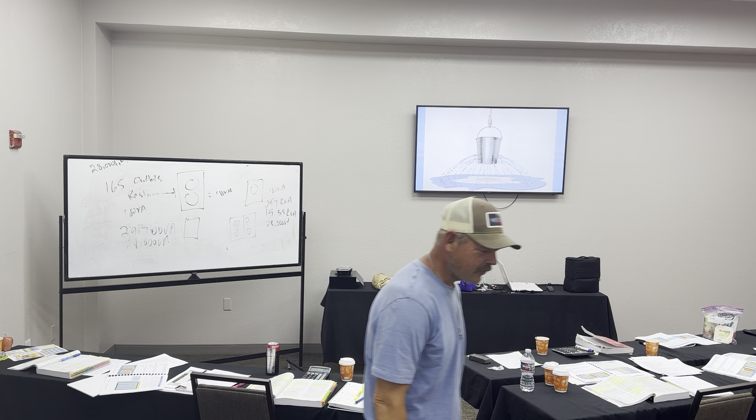I don't know, you think it's gonna... Is this your number? Well, maybe nobody. This one, right, is your cell phone? Yes, sir. Yeah, they're 914.